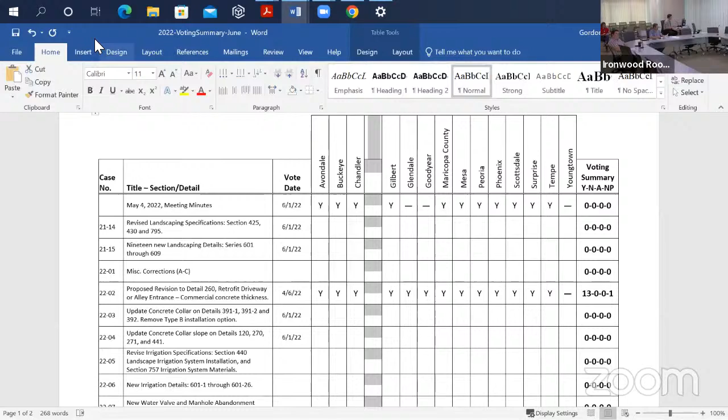Okay, we're going to go to item number 4. Revised landscape specification, section 425 topsoil, section 430 landscaping, and section 795 landscape material. Update sections based on landscape irrigation group recommended changes, sponsored by Ryan Nichols, Mesa, and an outside working group. I guess Ryan's not here, but I'd certainly like the proxy to say something about this case. And it is up for possible action.

Yeah, I guess that's my cue.

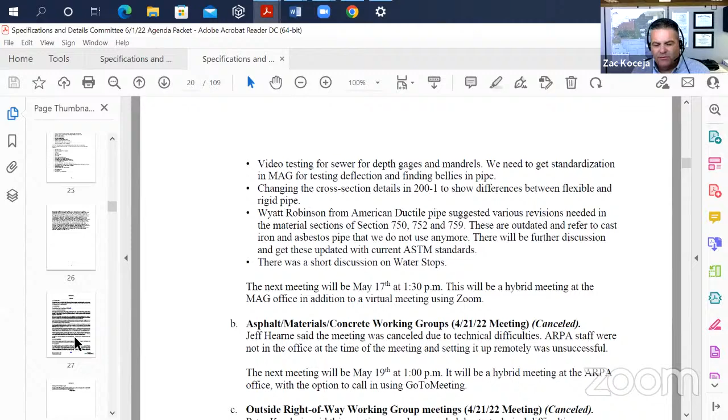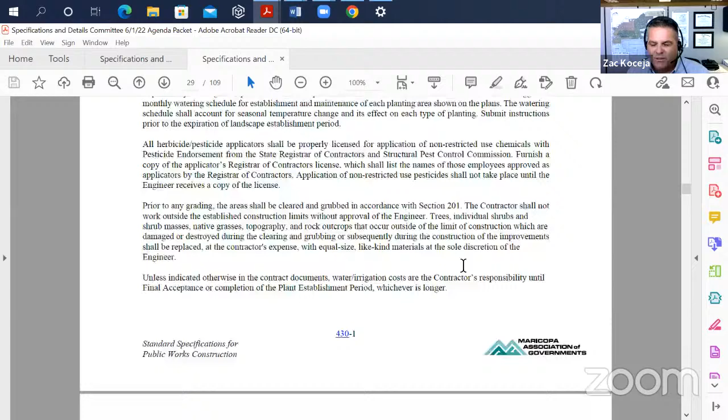So I'll talk specifically about these cases. This has been an effort that a few of us have been working on with MAG for quite a while on the landscape specific specifications. We've gone through multiple revisions of updating the specification sections for three sections: 425 topsoil, 430 landscaping, and 795 landscape materials. We've submitted these in the past for review and comment.

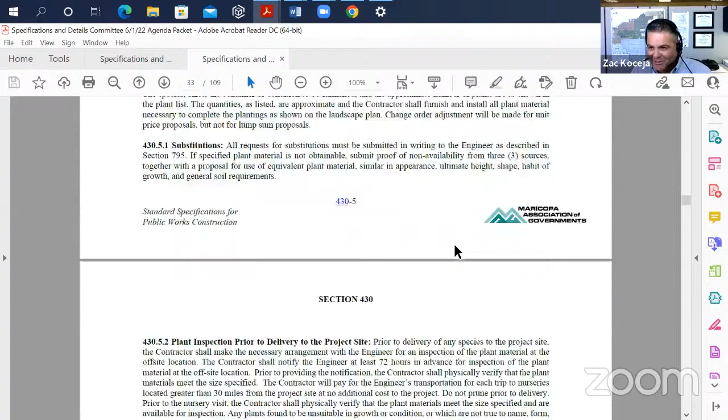We just went through an additional, what we're thinking is a final round of review and comment, and those comments were incorporated. I provided the final versions of these to Gordon last week to be presented for possible action of adopting these sections of the landscape specifications. I know we have Wayne Colbank with Logan Simpson Design and Ann with ASU on the call as well. I'm available for any questions, or Gordon, if there's something I left off, please feel free to chime in and correct anything I mentioned.

This is Peter Kandaris also. We discussed this in our last working group meeting. I think in terms of the specifications, we really didn't have a lot of changes, Zac. The ones you submitted last time, I think it was the details - we had the naming changes more than anything else. But in the spec, did we have any real substantial changes in the wording?

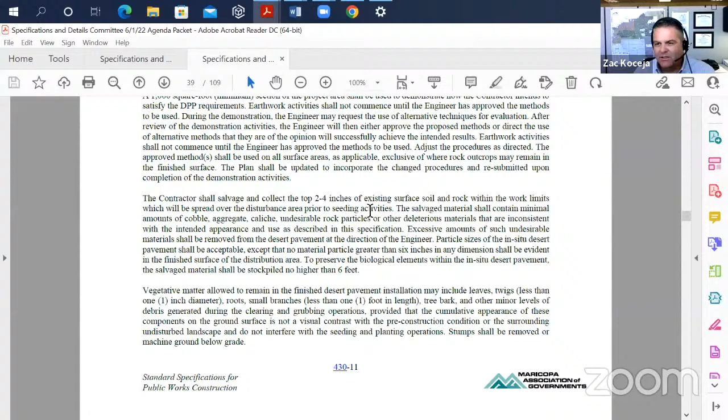Not so much in the content of the wording. Most of it was grammatical changes, but not really in the content. I went and incorporated the final comments, and nothing really changed from a content standpoint. It was mostly just cleaning up some of the text and grammatical changes.

Yeah, that's what I thought. We've incorporated any comments. I think we've now gone a number of cycles waiting to get more comments. Everything we have has been incorporated. So we're at that point - there's not a lot more we can do with the standards component.

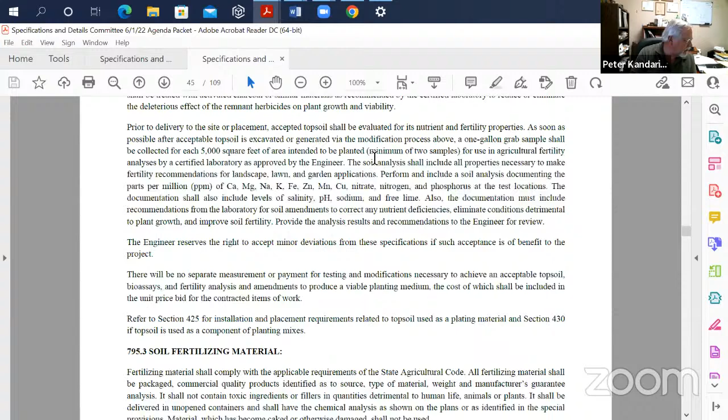Are we talking about both cases simultaneously, the 2114 and the 2115? I can't remember - we're going to do both at once. Separately. I'm sorry, we'll do it separately. Okay, good. Yeah, that one we did do some changes, not to content, but I think we're kind of at that point on the standards changes. We don't have anything else really to do left on it.

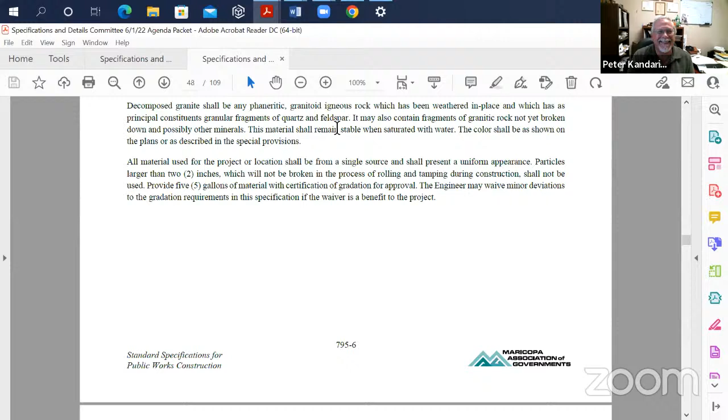And I can call for a vote, so. Are there any comments from the committee, questions or anything? Or does someone want to provide a motion to approve?

Carl, I'll go ahead and make a motion to approve case number 2114. This is Warren, I'll second that.

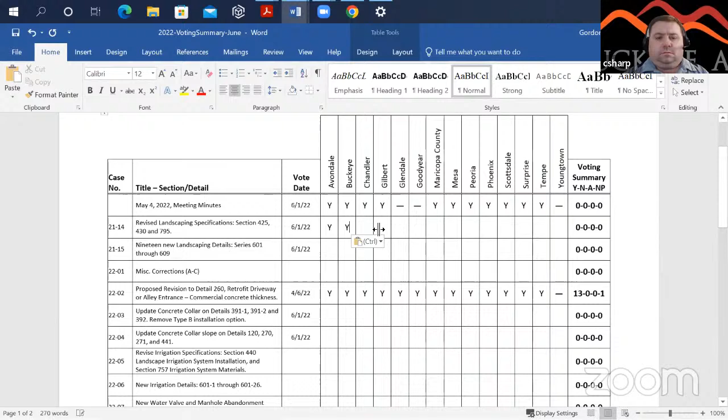Now we're going to do case 2115, new landscaping details - 19 new details based on city supplement and landscape irrigation group recommendations, 601 through 609 series. These are new details, all brand new, and they're distinct from, related to the irrigation companies.

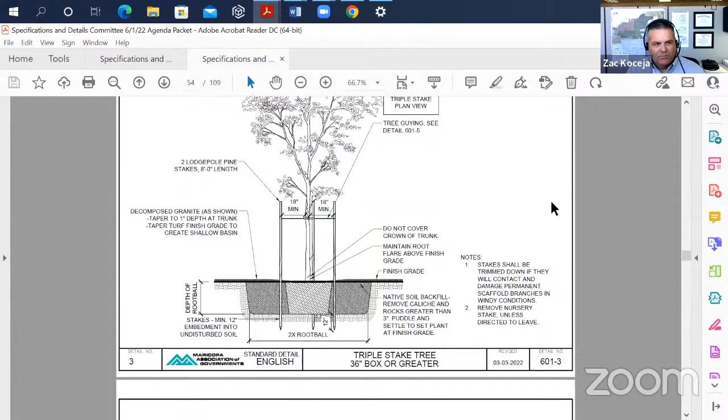This is Zac again, I can go ahead and talk about the details as well. This effort to bring to light these new details was a concurrent effort with the landscape specifications. We spent a little bit more time working with MAG on reviewing the specifications. These details have gone under review, and I believe there's a little bit of content change, but the biggest comment was numbering the details in an order consistent with MAG as far as sectioning. There was an additional detail recently added, for palm tree staking installation and staking. So that was the last thing that changed - the numbering and the addition of that palm tree staking.

Yeah, if I remember right on our grouping, you'll see there's now 601-1, 2, 3, and so on, the 603-1s. The groupings were based on the type of installation, and I'm trying to remember what we did - I'm looking for my notes here. So I think the 601 grouping, Zac, those were for trees.

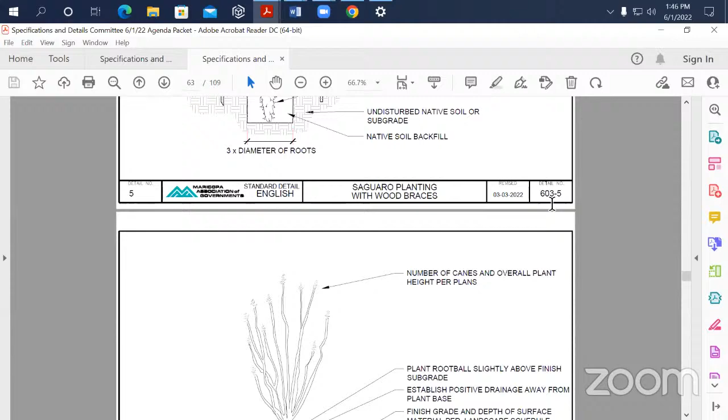Peter, this is Wayne. There we go. Yeah, the 601 was for the staking of the plantings. The 603 was actually the planting details themselves for all plant types - as you'll see here, there's agaves and prickly pears, trees, and even the palm tree that was added. The next series was what we call hardscape, or the decomposed granite and the rock materials.

And so the details were broken out and reorganized by groupings of activities, as was suggested. I think this makes it nice now, because if we had any details related to those groupings, we don't have to keep on this. They won't be mixed up with everything else.

So if you have another planting detail, it goes with planting work. If you have hardscape, it goes with hardscape. And I think that was what we wanted to get in.

I think the palm tree was the city of Chandler. We got that added to it. There were some minor changes, I think, made from the city of Chandler that we talked about in the working group.

Yes, this detail was suggested by Warren, which was a great suggestion that was actually overlooked. The basis of this was a city of Chandler detail. Through that, several of our landscape architects have made some adjustments. We passed it back through Warren, and Warren has given us a thumbs up on it. Okay, so he's had a chance to see it then. Good. Yes, it looks great.

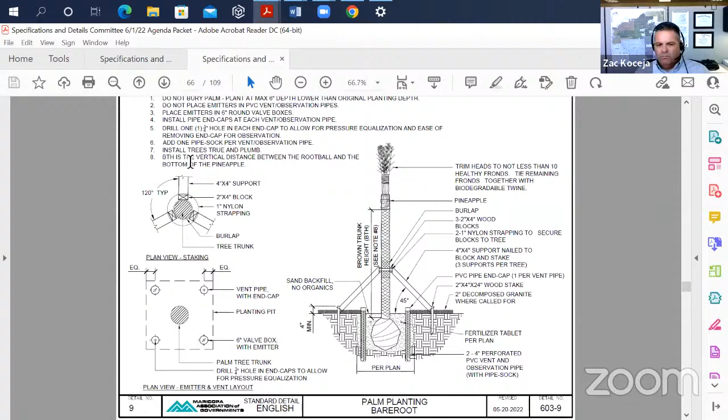Section 430, I'm trying to pull that up. Do we specify within it the type of fertilizer tablet? It's actually going to be in 795. Oh, okay.

All right, I thought it was okay. I'm curious, I don't have that. I thought I had them both sitting here, but I don't. Fertilizer tablets are a pretty common material. Yeah, I'm just trying to see how we word it. Something that's not going to be missed by anybody, I don't think.

I'm just trying to see how we worded it in 795. Remember which subsection? Take a look at section 430.5.6, I thought that was it. I know it calls for... if you look at section, yeah, you're right, 430.5.6, it calls for the quantity, but as far as the type or the manufacturer, that may be covered in 795.

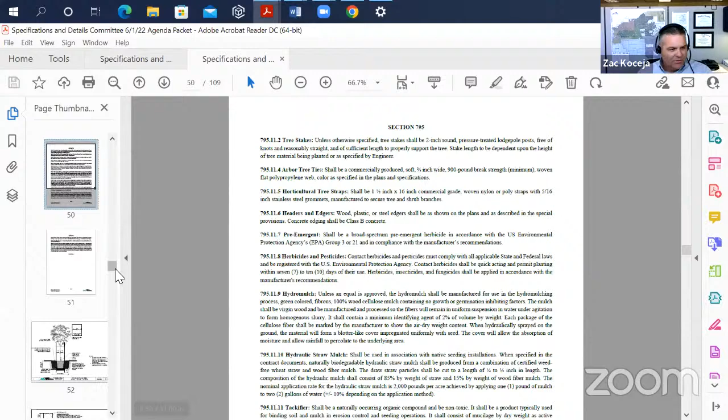I'll look there as well. What did you say for the subsection? Right, 430.5.6. That's got the quantities, yeah.

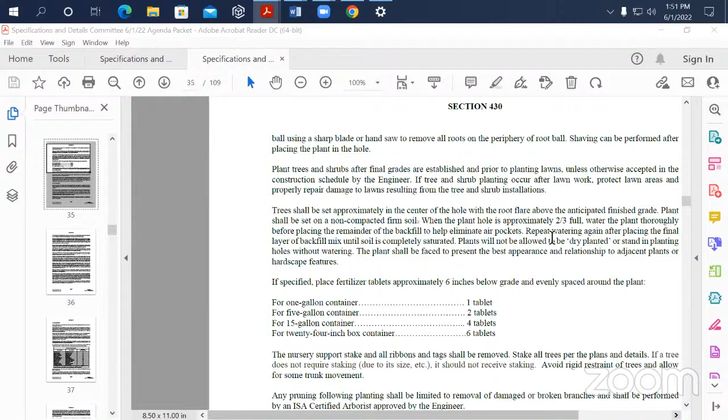Oh, if that's the case, we really should be referencing section 430 then, even if it's in the most general sense. Reference it and maybe then say 'or as specified on plans,' something of that nature. Yeah, that's not a bad idea.

This would be then more of a default, unless otherwise specified on the plan, something like that. Oh yeah, this is if specified. Yeah, this is an 'if specified' case.

Again, I'll trust your judgment on standard industry, so whatever makes the most sense. Yeah, that's a good point. We're going to get a contradiction here or not.

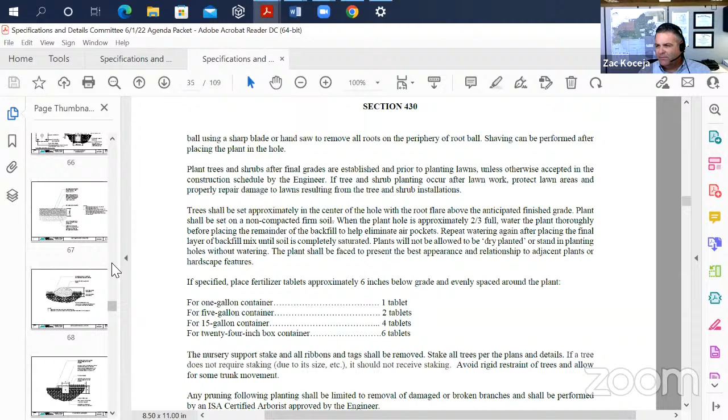I believe the palm tree detail is the only one that calls it out specifically. So maybe what we do is just remove it from that one detail, and we always have the specifications to go back onto if the designer chooses to specify tablets or not. Yeah, that may be a better option. If the specification doesn't say it's required, there could be easy confusion on the detail.

That makes sense to me. Yeah, I think I'd agree. Get rid of it there. And then related to that, after you make that note, in section 795.3.4 is where it talks about the chemical composition of the fertilizer tabs, just for reference from the material standpoint. Yeah.

If we remove it from here, it becomes a non-issue. Yeah, I agree. Any other thoughts on that?

I'm definitely not a landscape person. That's what I do on the weekend at home.

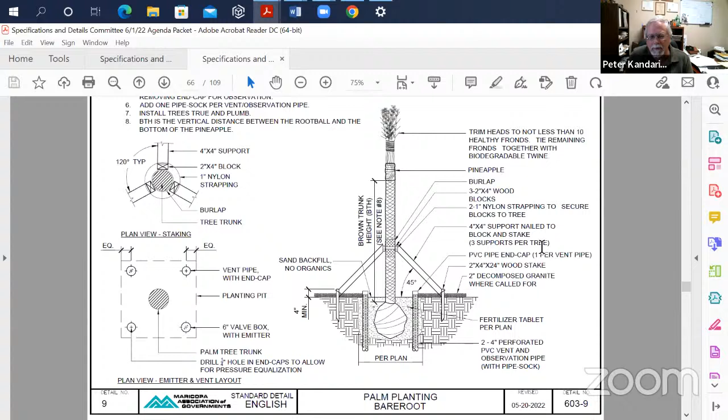So do I understand that the suggestion is just to remove the reference to the fertilizer tablet on this detail? Yeah. If we don't, then we really should be specifying where more information is on it in the standards. But if the standard says 'if specified,' we're kind of going around in a circle. If it's noted here, it's going to be assumed it's always used, but in the standard, in the spec, it's not saying it's always used.

It's easy enough to remove this note from the detail.

Besides the fertilizer tablet, are there any other comments or questions? Just a little minor comment on the bottom left. For detail number 9, I just need to have 603-9 on both sides to be consistent, right? Yeah, that's true of all of the details. I noticed that as well, but that's a very minor thing I could correct after the fact if you did want to go ahead and vote on them today.

Okay, so we have: remove the fertilizer tablet callout, and correct the title blocks — I guess remove one of the 9s or make them the same on both sides. Any other comments?

Yeah, Carl, this is Jim Badowich with Avondale. Should there be any dimension as far as how deep these things get buried? I'm trying to find it here. Maybe it's here, I'm not sure. As far as the depth, and I know when working with contractors there's a specific depth they need to be planted to — this is for the palm tree. Is it covered in a note?

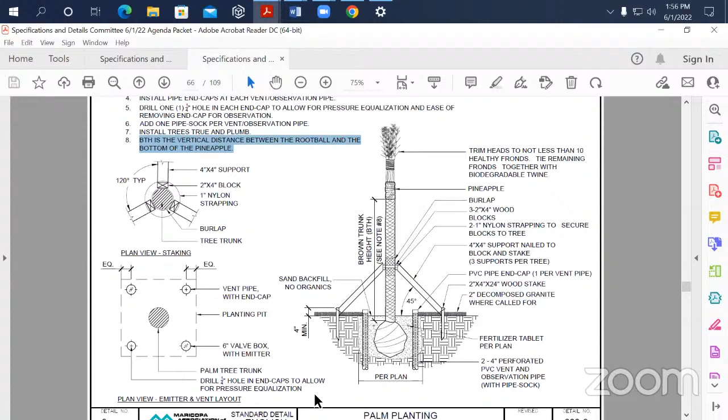I've been told it's critical how much dirt is put over the root ball as far as placement. I don't know if that's on here. Wayne, you're on mute — I wondered if you could address that, because I thought we had talked about that. Yes, and I thought it was on the detail. Yeah. Can you scroll up, Gordon, on the notes? Yeah, it's the first note.

What does that mean, 'at max 6-inch depth, lower than original planting depth'? You'll see on the detail that the top of the root ball can't be deeper than 6 inches below the finished grade, because palm trees are basically relocated from site to site. It's that dimension of staying within that top 6 inches that's the critical piece, so you don't bury them — people have done that in the past. People have stuck the root ball up above grade, but that's not really the common practice. Mostly people tend to bury them deeper than need be, and so that's the dimension that's critical there.

But how do they know the original planting depth? These come from California — it needs to be something they can measure in the field and say, okay, here's the top of the root ball, you have the root ball there. So do we need a note to specify that the top of the root ball is the original planting depth?

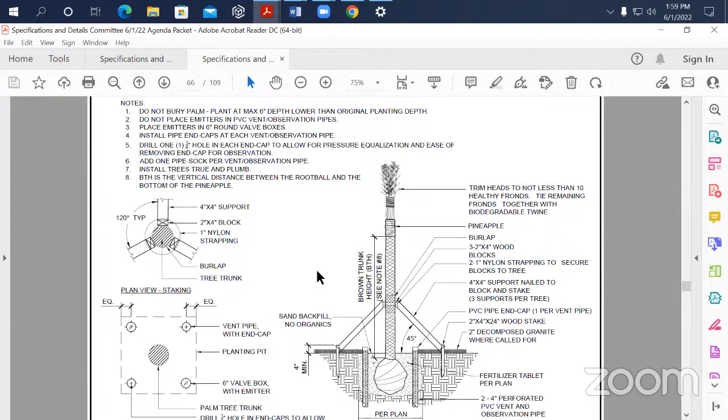Easy enough to do. Because it's a big operation — you've got traffic control, you've got a crane waiting, and we don't want to be thinking about how deep to do this and then have to find out what the original planting depth was. It just seems like too much guesswork. A good comment.

So we have 2 changes that we would make to this sheet: change the words 'original planting depth' to 'top of the root ball,' and then delete the fertilizer tablet per plan and the arrow associated with it.

Any other comments, questions? So the question comes down to, do we want to bring this back next month with those 2 changes, or would you all like to vote on it now?

I think the change probably should be done by someone familiar with that detail. Okay, I think that would be appropriate. Okay, we'll just bring it back. We'll get those changes and get that resubmitted.

Mention where that root ball is in relation to the finished grade. Okay. Mike, thank you.

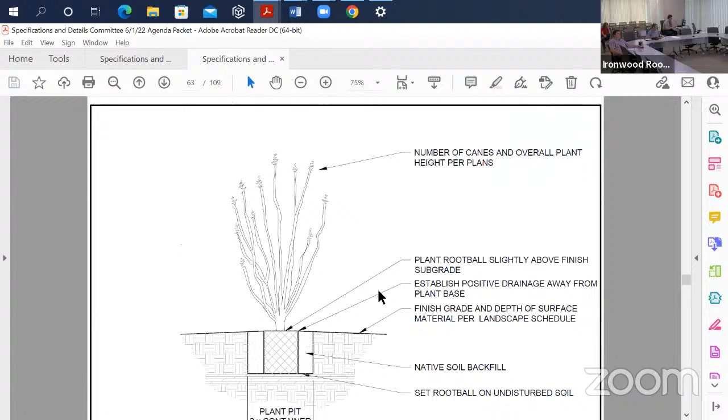Any other comments on this case? Okay, we'll hold this with these changes and bring it back next month.

Number 6, case 2201, miscellaneous corrections. We have 3 of them here that have been here for multiple meetings. Are there any other miscellaneous corrections anybody has?

Okay, not hearing any. We'll carry. Usually carry these till the end of the year and then vote on them.

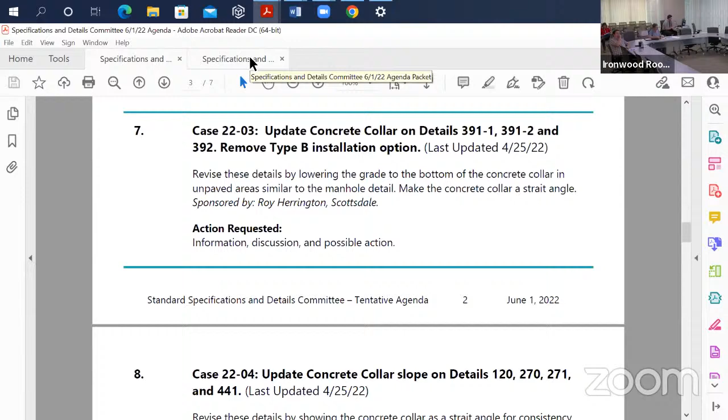Number 7, case 2203, update concrete collar on detail 391-1, 391-2, and 392. Remove type B installation option. It was last updated 4/25/22. Revise these details by lowering the grade to the bottom of the concrete collar in unpaved areas, similar to the manhole detail. Make the concrete collar a straight angle. Sponsored by Roy Herrington, and it's up for discussion and possible vote.

So, Carl, this is Roy. Thank you. Just an update to the committee: I haven't received any additional comments other than what was discussed at the last monthly meeting. We did have a meeting with the water and sewer working group, and there weren't any additional comments to this detail. This is making modifications to the concrete collar for detail 391-1, 391-2, and 392, basically taking the outside edge of the collar, which the current detail shows is 2 inches below grade, and bringing it so that the outside edge of the collar is at grade.

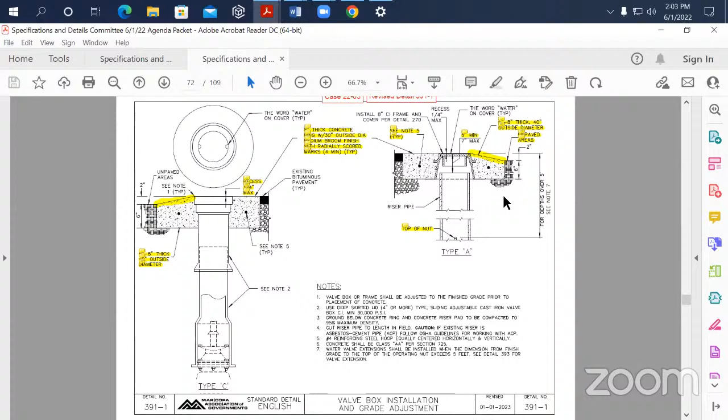So it kind of keeps the dirt or anything from washing into the valve box. Essentially, this was something that was brought up by our maintenance groups here at the city. But I have not received any additional comments.

And the detail, the 392, the debris cap — because we were getting rid of the type B, that detail was basically removed, and the collar was basically redrawn as what's proposed on 391-1 and 391-2.

I believe the old detail used to have like a curve, kind of a reverse curve type of thing. Exactly, almost like an S curve, like the roll curb profile that you would see in the street. Yeah, and this would be probably much easier to pour and form and finish.

Are there any questions or comments on these detail changes? Carl, I'll make a motion to vote on and approve case 2203.

Carl, I'll second that. Okay, we have a motion and a second to approve this case, 2203. We'll take a vote.

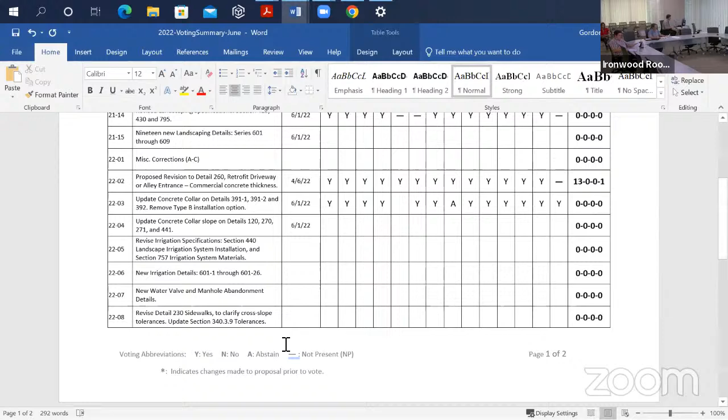Okay, number 8, case 2204. Update concrete collar slope on detail 120, 270, 271, and 441. Last updated 4/25/22. Revise these details by showing the concrete collars as straight slope for consistency.

Sponsored by Roy Herrington. Basically, I think it's pretty much the same as the last case. Anything on that, Roy, you want to tell the committee? Thank you, Carl. You're exactly right.

This case kind of stemmed from that previous case. Essentially this is making the collars for the survey marker, for detail 270, the frame and cover and grade adjustment, 271 and 441, consistent with the collar from the previous case 22-03.

And this case as well, I hadn't received any additional comments on. Does anybody want to comment on this case or have any questions?

Does anyone want to make a motion to approve this case? Carl, I'll go ahead and motion to approve case 2204. Okay, thank you, Craig. This is Warren, I'll second. Okay, we'll take a vote.

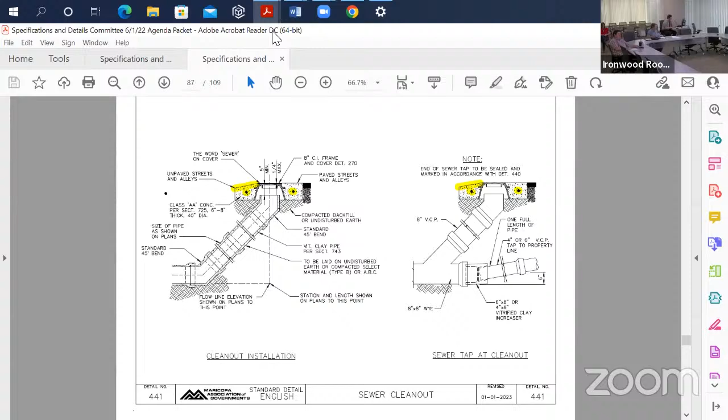Starting with Avondale, Yes. Buckeye, yes. Chandler, Yes. El Mirage, Yes. Gilbert, Yes. Glendale, Goodyear, Yes. Maricopa County, Yes. Mesa, Abstain. Peoria, Yes. Phoenix, Yes. Scottsdale, Yes. Surprise, Yes. Tempe, Yes. Youngtown, Yes. Thank you.

Okay, that case passes.

Number 9, case 2205, revised irrigation specification. Revised section 440 landscape irrigation system installation and section 757 irrigation system materials, sponsored by Ryan Nichols.

Zac, would you like to, I'm not sure if Ryan passed this on to you or not, but would you like to talk about it? Yeah, for sure. I'm wondering, Wayne, we didn't coordinate beforehand. Sorry, Wayne, did you want to mention anything regarding the specifications or details on the irrigation? Would you like me to take the lead? All right, so not hearing a response from Wayne, I'll go ahead and explain.

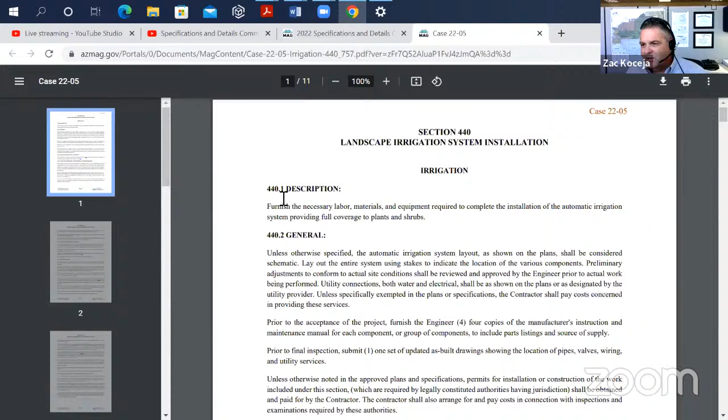Very similar to the landscape specifications, the irrigation section works hand in hand with the landscape and irrigation design. We have some design specifications as well as materials provided in these specifications. I believe we are a little behind as far as the timing of the irrigation, going with the landscape specifications, but we've gone through multiple edits. We feel these are like a finalized version. I know these have been presented, I believe we discussed them last month, and so they're currently out for review and comment. I don't know that I've received too many comments.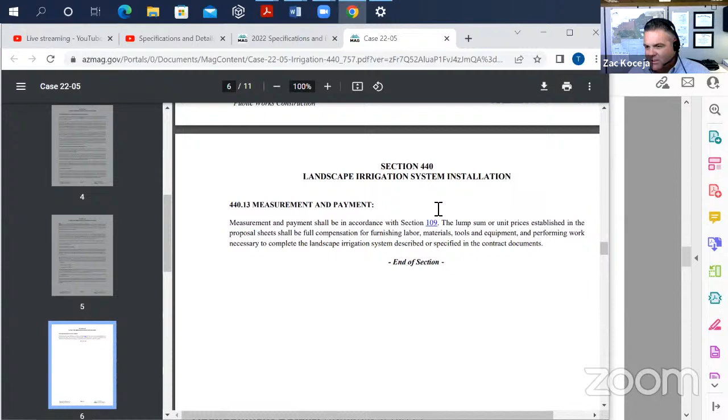I need to follow up with Ryan to see if there's been any other comments come in. But again, this really the same, it's a very similar effort to the landscape specifications where we haven't had up-to-date specifications and or details for the landscape irrigation. And so this will update both sections and provide a complementary set of specifications and details for the landscape details that were just passed, adopted, approved.

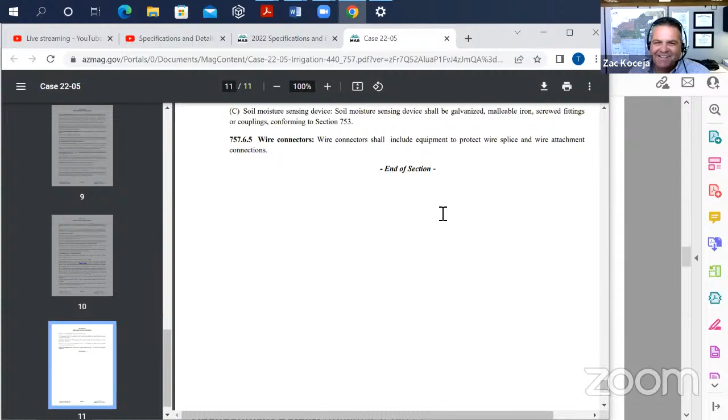One of the things we've been requested last time, when I was in the process of doing, is kind of creating a roadmap of the sections, because I think the question was everything brought over completely. Unfortunately, I was not able to get that completed by this meeting. I am working to get that, to provide a comfort level that things weren't missed, or I'd be able to have the committee and their staff see what was changed and what it looks like.

Simultaneously on the details, I know it's almost easier to talk both of them at the same time on this, that we and Wayne and company were in the process of organizing those also. We had not, at the time of our last working group meeting, come up with specifically how they were going to be organized. So I think we're still, unless something, Gordon, did Wayne submit anything on those on a reorganization? I wasn't sure. I don't think there's been any changes to these details yet. Yeah, I didn't think so.

So we have to do a similar thing on these. We're putting them in groups. Right now, I think they're just straight numbered off. So we're going to be doing that probably at our next working group meeting. We'll bring that up on the 16th and get these ones organized in a similar manner, so any additions or modifications stay within the same number group. We don't get them jumbled all over the place. I think we're going to start on what we thought.

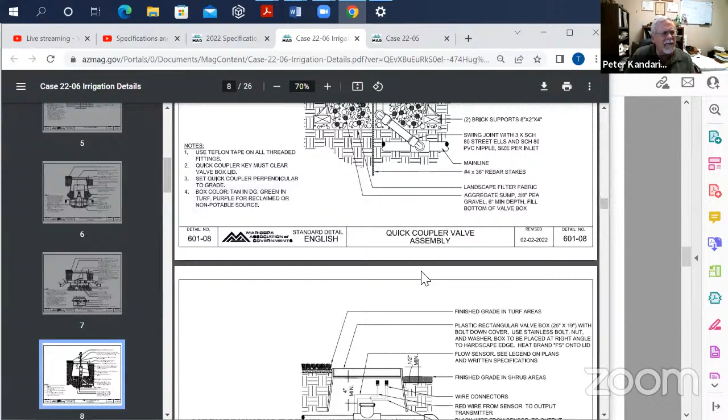I think we said like 610 or something, starting that series with the irrigation. Try to leave the planting and the plants and hardscape stuff in the 600, and then we'll start 610 on these ones. So that's something we still need to do on getting them organized while we were waiting to get comments in.

Are there any other comments, questions? This is Warren. Just one minor comment on this, on the sections, the subheadings on those sections. Those I don't believe you need. It's sort of inconsistent with the rest of the MAG sections. Just that at the beginning of each section, there's a subheading.

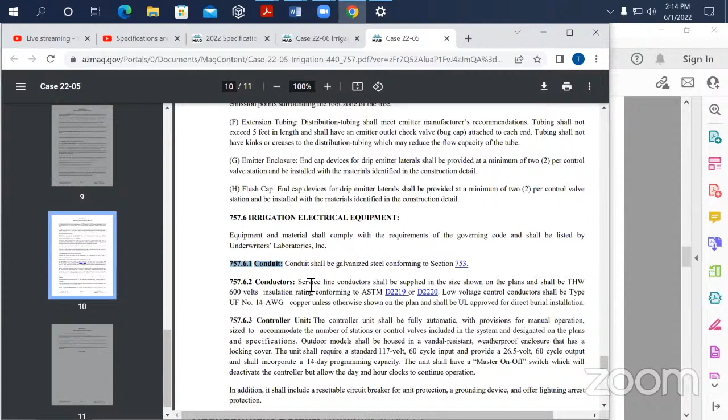You mean these? But the very first page of the specs. Correct. If you go up to the very beginning there, right there, irrigation. So that's, I don't believe that's something we've used in other sections. Yes, you're correct on that. We need to delete that to make them consistent. You're correct.

I have a question on landscaping, irrigation in the right of way. Is it subject to trace wire at certain depths? I don't know if it's subject to the other laws that govern underground utilities, but I do know that on some projects we have problems locating irrigation lines when we're doing reconstruction.

I am not an expert in that. I don't know, Zac, do you know more about that? I apologize, I haven't read through them to look for that. That is an issue on many projects I've worked on where there's irrigation. I know nobody really knows where the lines are.

When it comes to utility locating, for example, ADOT will, if you call them for a blue stake ticket, they'll go out and actually hook up to the ground on the wires, the control wires of the irrigation system, and that's how they'll trace out the irrigation lines. If you've got irrigation PVC lines in the ground by themselves, then of course, unless you have a tracer wire, you're never going to locate that line unless you hit it.

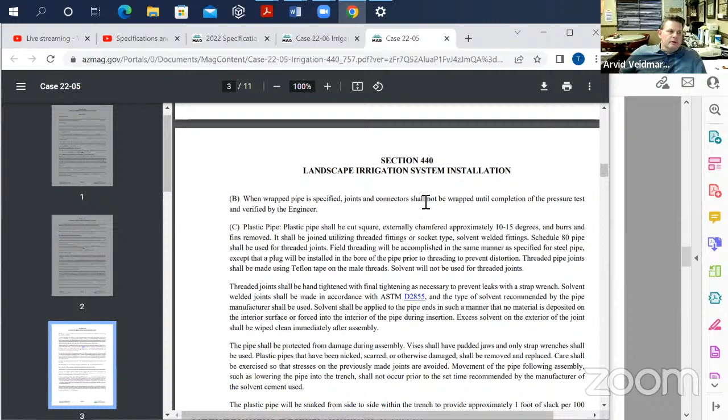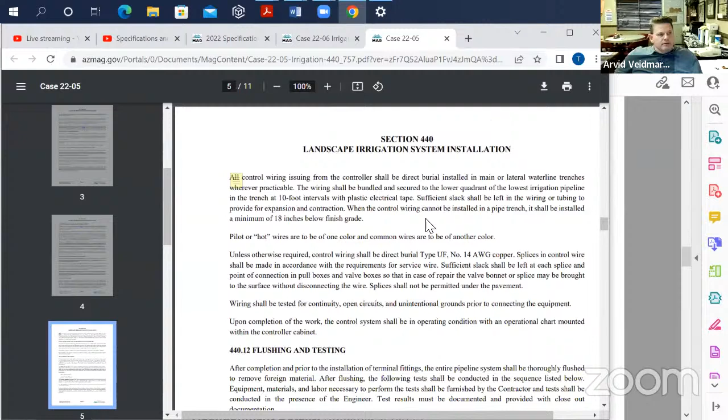I do not think that tracer wires are required on the pipes themselves, though. Typically, no. If you take pretty much any county, state, or city project that's landscape based, they're not going to put a tracer wire in with the irrigation lines, and that's typically because the irrigation main is where the control wires are. So they use the control wires as the tracer wire. Off of the main going to the various zones, it steps down in size, but it's the main that's typically under pressure, which is obviously one side of the valve.

The other side of the valve, where there's not always water, will get hit, and then it'll get repaired and just put back in service typically before it goes active.

Yeah, I've thought about that too, Carl. It's true, most of the wiring is put in the same trench as the main line, but it is important to locate these pressurized main lines. Once you get to the control valves, it doesn't matter because you can shut that off, and you're not going to put tracer wire on laterals and all that, but the main lines need to be marked.

So my only comment on that would be, if they don't use a joint trench for the wiring for main lines, then the main line needs a separate tracer wire installed. And again, this is just in the right of ways.

And to that point too, you need to make sure on some level that the shutoff valve is readily known, because that's one of the biggest hurdles on specifically ADOT projects. The shutoff valves for the main are typically a mile apart in those fenced-in houses, and you can't get inside of them without cutting the locks off. So you'll have water run for hours and hours before you get someone on site to actually shut it down.

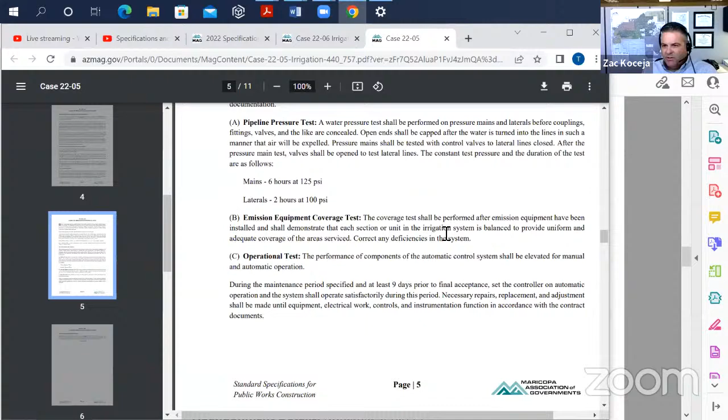Is that in here, 18 inches? Is it specified here? Yeah, I'm pretty sure, this is a good comment. I'd like to go back and just verify two things: that we have a main line at 18 inches - yep, right there, control wire - and that our lateral lines are 12-inch minimum.

But it's a good point, because a lot of times you may have a main line extension for some reason that doesn't have a valve on the end, so there wouldn't be a control wire that runs with it. So if you're trying to trace out that main line, for some random reason, you may not have a control wire next to it. I think we can put in some wording that in the event that situation occurs, there will be an identified tracing wire that goes along with that main line.

Yeah, also, we just did that on one of our projects. The wiring is for, we shifted the meters, so our main line isn't going to have any wire with it. So we're wanting it marked with tracer wire. So it does happen.

Question for you on the main line itself too. Do you spec out an inline valve every so far to allow for shutting off and isolating a break, or is it just at the meter station for the control house?

My background is mainly from municipal type projects and not really long linear projects in the right of way, but typically we have isolation valves a lot more frequent than mile intervals. Even on some of our roadway projects in the right of way, we would do isolation valves more frequently for that reason. So you're not going far out to find an isolation valve in the event of a break.

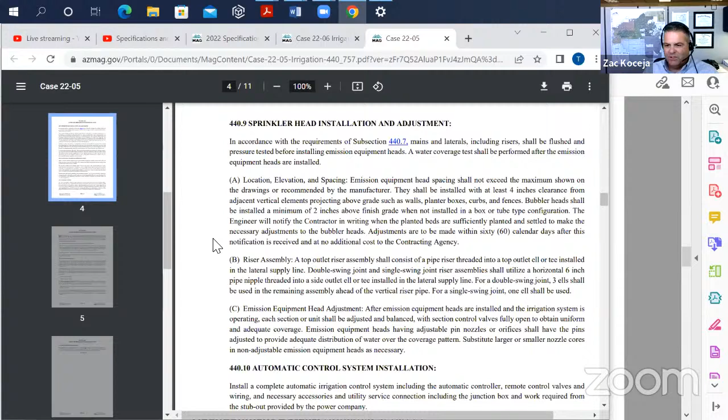But again, this was perfect. This is exactly what I was hoping to hear, some feedback on making sure some of these detail items are included in the specs. So I'll definitely double check the things that have been mentioned so far.

Yeah, and I'll double up on that, Zach, that we do like to get all the comments, and these ones we'll talk about at the next meeting. I know you're going to work on it prior to that, the meeting on the 16th, and we'll have it ready for July. But as we start getting toward the end of the year, it would be very nice to get these voted on this year if we're getting these comments resolved rather quickly.

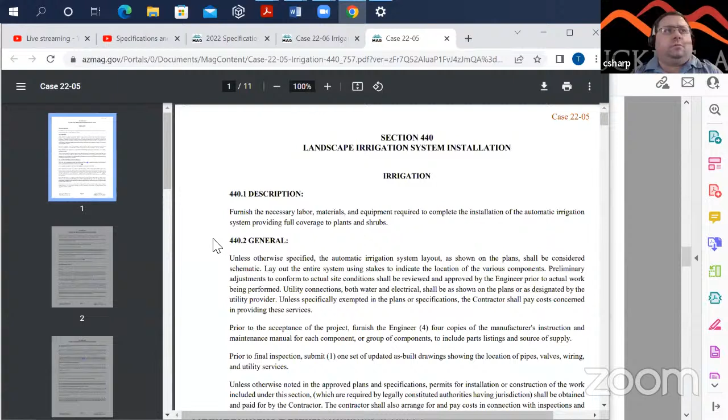Peter, Zach, this is Craig out in Buckeye. Quick question on this, just the specific comment on the wired joint trench. Is there a way we could put this in the details in the 2206 section? And the reason I ask is most of these things, when our contractors are putting these in, they're looking at the pictures, which are the details, and not so much the specs themselves.

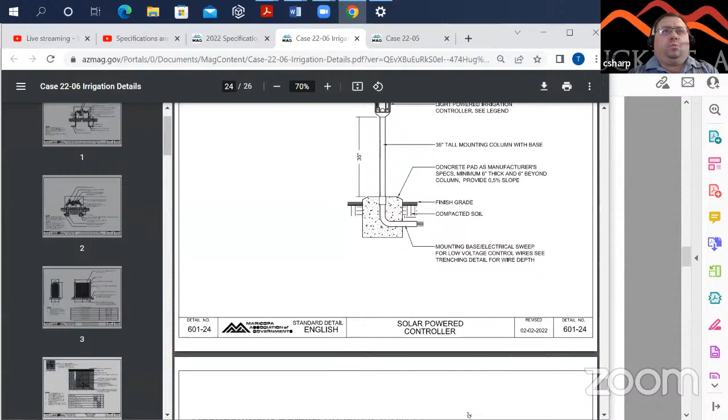Yeah, no, that's a really good point. I believe we have a detail section specific to that. It should be like a pipe placement depth, and it calls out the wiring. Maybe scroll through these, I don't remember offhand. Yeah, detail 60104 and 60105, trench sleeving, pipe and wire trenching. So yeah, I was kind of looking at that, and we were talking 12 to 14 inches deep.

I guess I need to look at these details a little closer. This section calls out the mainline depth—2 to 4 inch at 18 inches deep, going deeper depending on pipe size. It also calls out that control wire location should remain on the same side of the mainline throughout the project, so adjacent to the mainline, not underneath it.

If there's anything we need to do to add additional clarification from the detail standpoint, I totally agree, because not everybody's looking at the specifications. The pictures are a lot easier to follow in the field, so we definitely want to make sure it's clear and understandable.

Right, exactly. Okay, Zach, one question—I need to study these a little more too, but I know we have instances of potable irrigation or reclaimed irrigation. Is there anything where we need to mention that? Obviously with reclaim you have to identify it differently, and I believe that's covered in the specifications.

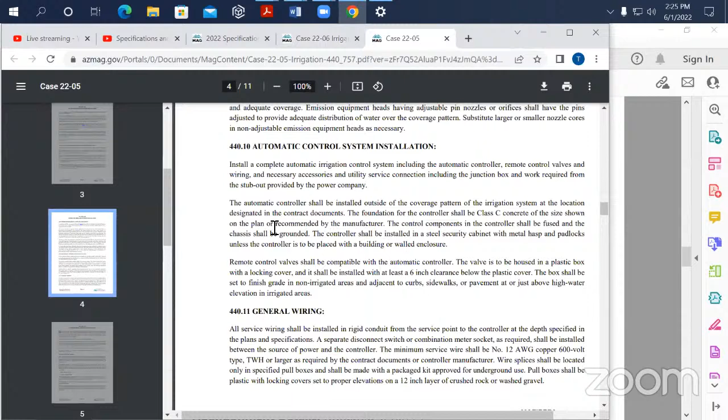I think you're good there. Well, look right here, the one on the screen—if you go back to note 4, it talks about purple for reclaimed or non-potable source. I believe that's infused throughout both the specifications and the details. Anytime it's a non-potable water source, it's required to have purple valves, purple lids, purple boxes.

That's a great comment, something we can go back and make sure is consistent throughout, giving you the option—if you're doing a potable water source you don't have to follow the purple. There are cases here at the City of Mesa, anticipating future water source changes, where we're using some of the purple equipment even though it's a potable source. Not typical, but I like that there are two options within the specifications and details. That's a good point; we can make sure it's clear in the specifications too.

These are brand new specs and details, correct? The details, yes, the specs, no. Okay, and I have to be honest, I only saw them for the first time after the last meeting, which I wasn't at. So I need to review these, and I'll try to get them back to you well before the next meeting.

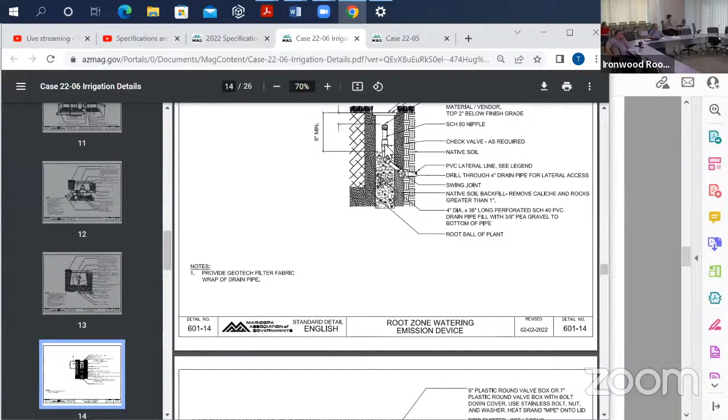Oh, that was another question I had—you've got a lot of equipment callouts. I assume it's pretty generic, not name brand, or maybe something called out or equivalent. I don't remember us having any product names, specific vendor-related product names called out, but I'll take another look. Not that I remember—not in the 700 section, I know that.

I know there was effort to not be manufacturer specific for various reasons. Yeah, so all these details should just call out, like, the pop-up head—basically just pop-up head, rotor type, see legend. So on the plan sheet, for City of Mesa, if it's not a federally funded project, we use our preferred products that our landscape maintenance crew has on the truck. In our landscape legend is where we'd call out if it's a Rain Bird or a Hunter or anything like that. But from the MAG standpoint, the specifications and details, we knew we couldn't be manufacturer specific on the equipment.

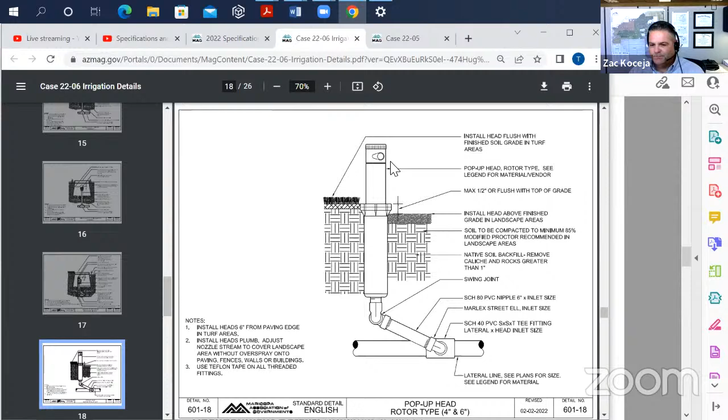Any other comments from anybody? I'd encourage all of us to really take a look at these—this is a pretty big deal, these brand new details and updated specifications. So I think when they're put to use there's going to be quite a bit of feedback coming back from the field, so it's important for us to really take a good look at these details and try to get any comments in.

Would that be to Zach, or would it be to Ryan? It should go to Ryan, I think. Ryan? Yeah, okay. Ryan's been collecting the comments and then he forwards them on to me and Wayne, and we implement the comments, but the back and forth is through Ryan.

Okay. Have we anything else, or have we pretty much talked through both cases, 2205 and 2206.

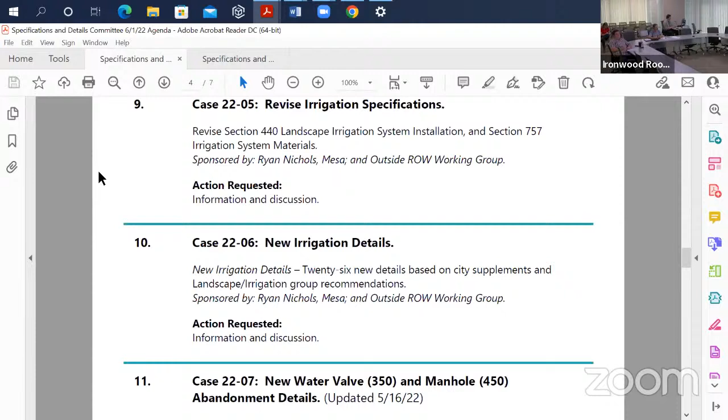Carl, just as a general comment to Peter, Zach, and Wayne - I've made this comment before - with these new details, it's really going to up our game for the rest of the details because these are very, very nice. Yeah, they did a heck of a job on them.

So kudos to everybody. Anything else?

Okay, we're going to go to number 11, case 2207, new water valve 350 and manhole 450 abandonment details, updated 5/16/22.

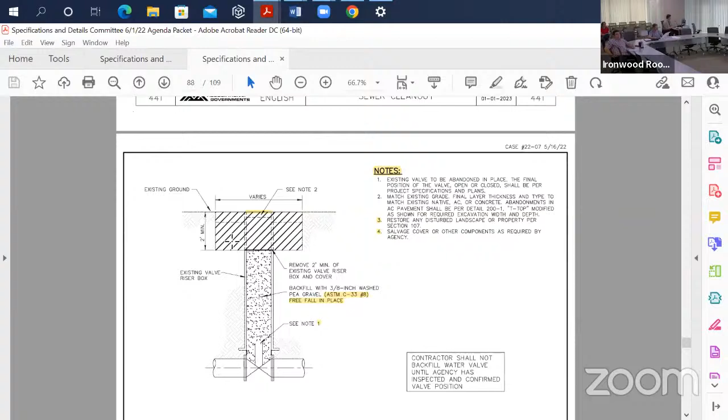Create a new detail 350, existing water valve abandonment, and detail 450, existing manhole abandonment, sponsored by Warren. You want to let the committee know what's going on here, Warren?

Sure, thank you. Good afternoon, everyone. The highlighted changes reflect the comments from our last committee meeting. We did review these in the working group, and I don't believe we made any other changes, so this reflects our comments from last time.

And then some additional ones I received from Craig - I'll talk through those, his group had some good comments. Starting with the backfill for the pea gravel, see now the ASTM references there, and also the free fall in place compaction. Does that look okay to everyone now?

And then just some other clarifications. There's a graphical fix I made at the top to show the actual valve cover a little more clearly. Notes 3 and 4 were added based on some comments from Craig and his group - good comments. Any disturbed landscaping or property has to be restored; Section 107 covers that, so I just used that. And then if the agency wants to salvage any of the components, there's that allowance there.

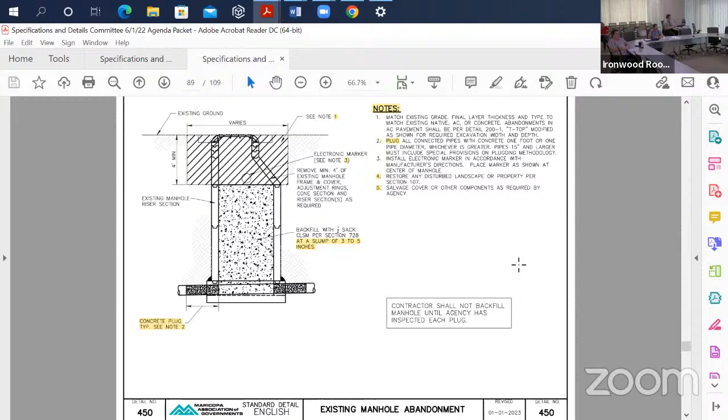Hearing none, we'll maybe look at bringing this forward for a vote next meeting. If you think it's ready, I'll action it. I'm ready for action. Any other comments? Okay.

Case number 12, case 2208, revised detail 230 sidewalk to clarify cross slope tolerance and update section 340.3.9 tolerances.

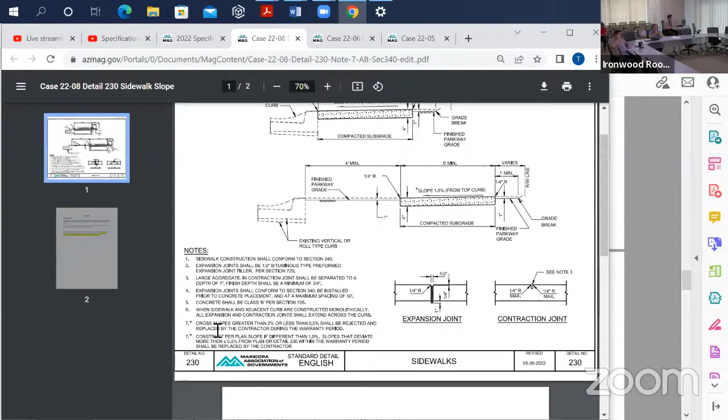I was not at the last meeting. My proxy was here, and I've read through the meeting notes, and I think towards the end it was suggested that maybe note number 7 - and I got 2 of them on this. One is the cross slope cannot be more than 2% or less than 0.5%.

If it's outside of those tolerances, then it would be rejected and replaced. But the suggestion, I think it came from Warren, was: construct per plan slope if different than 1.5%. Slopes that deviate more than plus or minus 0.5% from plan or detail 230 within the warranty period shall be replaced by the contractor.

So I wasn't at the meeting, I'm not sure which way. I think the first note 7 is what I had originally, and you had some problems with that. If there's that much of a tolerance, then there might be a tendency to not build it to the 1.5% or per the plan.

And then I went and looked at the specifications, and I know you have the straight edge type of thing, but I was looking more - this is where it all started, was it on the tolerances? They want all finished concrete width and alignment shall not deviate from the plans, typical section - I can't quite read it.

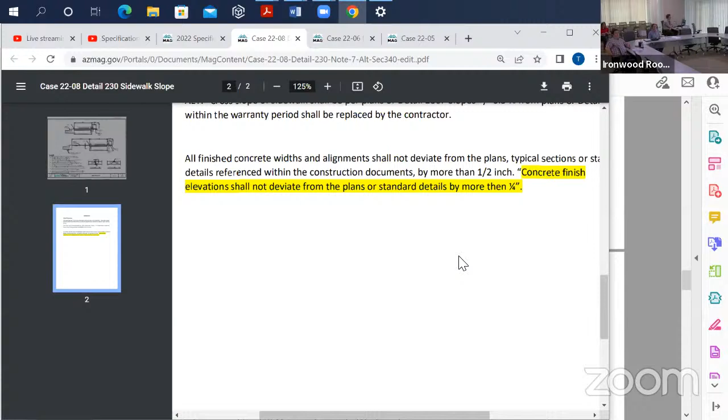It says in there now that it can vary by 1/2 inch. And if I do 1/2 inch vertical, you're going to get more than 2% on a certain width of sidewalk. If you allow the hold one to plan elevation, and you allow the outer edge to rise 1/2 inch, it will exceed 2%. So I added a sentence that concrete finish elevations shall not deviate from the plan or standard details by more than 1/4 inch. So there's an allowance of 1/2 inch horizontally, but I'm thinking the elevation is more critical, and a variation of 1/4 inch vertical will keep it within those tolerances.

Again, I'm open to any and all suggestions or questions on this one. We're trying to allow some variation, because it does happen over time where you poured it, set it, and finished it exactly to plan, but within the warranty period the ground swelled or shrunk, or there's landscaping nearby that caused some settlement, or other factors. I've dealt with this quite a bit, especially in areas with expansive soils.

Craig, I think you had some comments at the last meeting. Yeah, I'm reading through it right now, and I think the intent is we're looking for a standard cross section of 1.5%, not to exceed 2%, but 1.5% is the target. Reading through this, it looks like it's talking about concrete widths and alignments, which suggests we're looking at a cross slope tolerance and a longitudinal tolerance. I do agree, if we stick with 1/2 inch on our cross slope, we're gonna blow our slopes pretty bad.

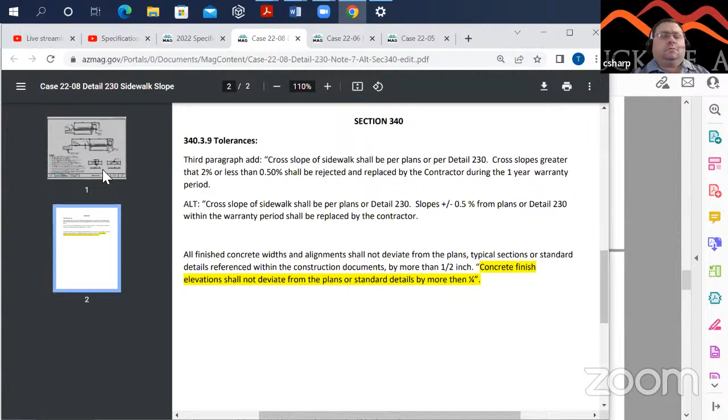So does it sound like the second note there is more in tune with the design intent of trying to build it to the 1.5%? Yeah, I like the second note. What I was always concerned about is, if we can go down to 0.5% and then up to 2%, you're going to have this undulating sidewalk, and I don't think any of us want that. But you have the possibility of that anyway. Yeah, but if we just throw the 1/4 inch on there and say this is where we're at, not to exceed — and if I recall, I think it was talking about, well, this is a cross slope.

When you start throwing in longitudinal slope, you've got to do your calculus and vector geometry, and you might get something different. But the way I interpret ADA is it's like taking a cross section, and it's that cross slope they're most concerned about. Longitudinal slope, at least in my research of ADA, especially on sidewalks, not necessarily curb ramps, but on sidewalks, they're not asking you to flatten the world for ADA standards. I believe the ProWAG guidelines actually talk about your sidewalk or pathways following the slope of the road you're adjacent to. So obviously, if you're on a 4% road, you're not going to get a 2% sidewalk.

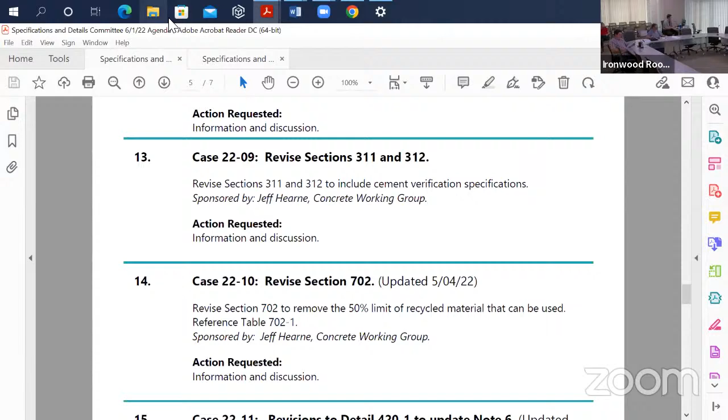Case 2209, revised section 311 and 312 to include cement verification specifications, sponsored by Jeff Hearne, Concrete Working Group. Thanks, Carl. I've received no comments, no discussions on the wording of either one of these sections up to this point.

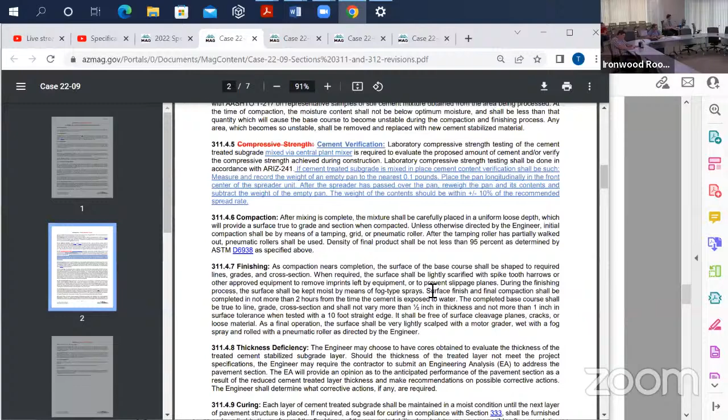Was this discussed at the working group? It has been several times, yes. Okay, I don't think I made it to your last working group. So again, I would ask you guys to make sure your team members have had a look at this. If we don't get any comments or additional discussions, I'll be looking at trying to move this forward on a vote in the next meeting in July. Hey Jeff, you didn't receive any comments from John Shee from Maricopa County, did you? No, sir. Okay, I'll make sure, I think he's seen it. I don't think he's got any comments, but I'll make sure about that. That'd be great, Carl. Thank you.

Any other comments or questions about these changes? Section 311, 312. Hearing none, we'll go to number 14.

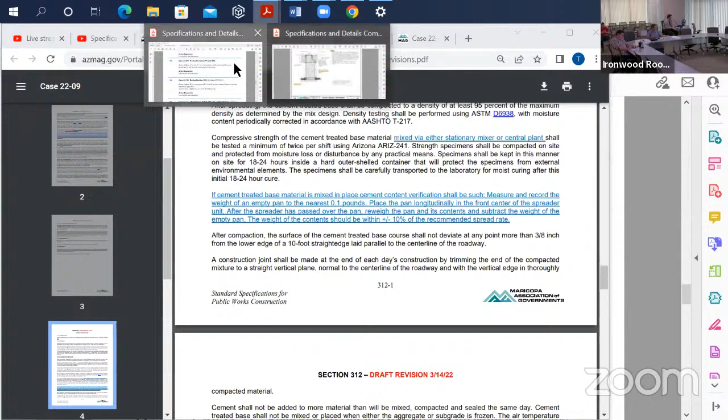Revise section 702 to remove the 50% limit of recycled material that can be used, I assume in asphalt mix, is that correct? For base materials, excuse me. Same thing, no comments in the last month.

We had no discussion about this at our last working group. I haven't received anything, so I would do the same thing here as with the last case. Make sure your team members have taken a look at it, and I'll be looking at the potential to get it voted on in the July meeting. Okay.

Any comments, any questions on this one? Yeah Jeff, this is Craig. I've kind of stuck a stick in my management side saying, hey, let's take a look at this, because we've had some standards on this in the past, and I wanted to make sure they're getting a look at this. So I sent it to them again as a follow-up, hopefully to get their attention. I'm trying to get something for you from our management team. So as soon as I hear anything, or if I don't hear anything, then I guess you'll know from there.

I appreciate it, Craig. We have several months left in our season yet. I would just like to have something we could finish by the end of this year on both of these cases to move forward into the standards in January. No, absolutely. And the one thing I don't like to do is come to you as soon as we're ready for a vote and say, hey, I got a comment, and we've had this for 3 months. So I'm trying to get ahead of the curve there. Craig, you would not be the first and probably not the last, but we'll take comments whenever we get them. Right on. Okay.

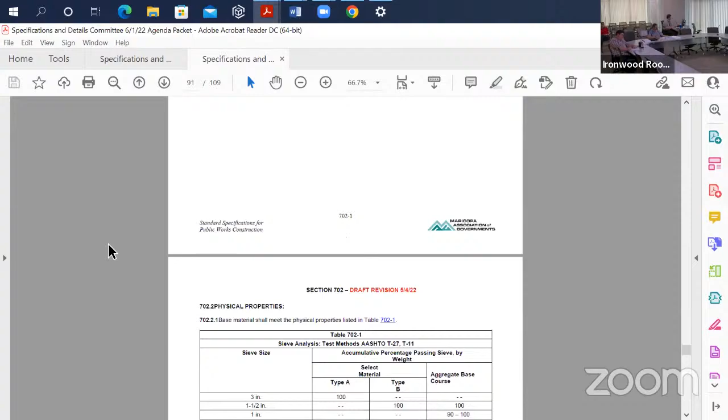Hearing no other comments or questions, number 15, case 22-11, revisions to detail 420-1 and to update note 6. Updated 5/16/22, revised note 6 to clarify depth measurement and manhole modifications. Jim Badovich is the sponsor on this one. Yeah, thank you.

So you see there the note 6 highlighted. That's been changed from what's in MAG now, just to clarify where that measurement is to be measured to, just clarify what is the 20-foot cover, because it wasn't clarified before. So we added that the 20-foot in depth is measured to the deepest outlet pipe invert shall require an engineered base design.

The only comment we had, it was brought up at the last meeting and then discussed at the working group, is that we don't really need the word outlet in there, because typically the deepest pipe should be the outlet if the sewer's working properly. So the only change, which I didn't have a chance to do on the detail here, would be to eliminate the word outlet. That was the only discussion we had at the working group. So I'll bring that back next month with the word outlet removed, and if there are no other further comments between now and then, I'd like to see if we can maybe vote on it next month.

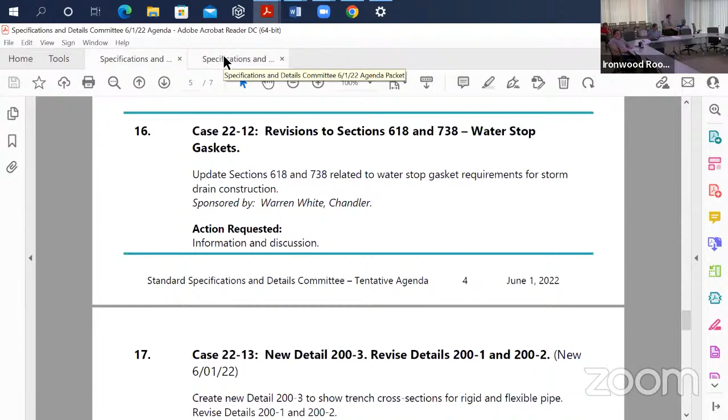Number 16, case 2212, revision to section 618 and 738, water stop gasket. Update section 618 and 738 related to water stop gasket requirements for storm drain construction. Sponsored by Warren.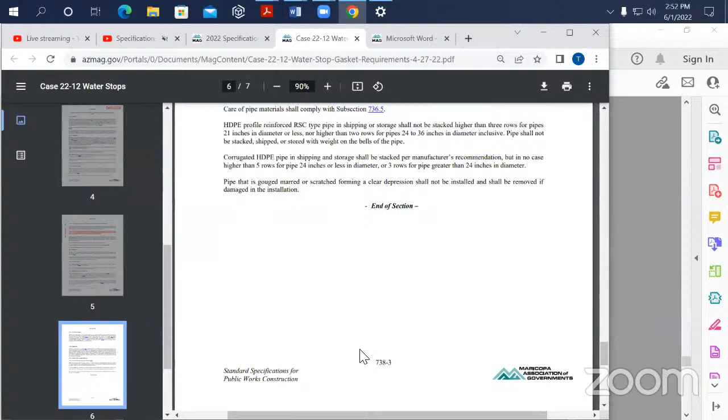No changes to the material in the pack at this point. I haven't received any additional comments, but we did discuss at the working group, and water stops are referenced in a number of other sections, primarily section 505 concrete structures, and also 615, 738, 739, 740, and PVC as well, 745. What I'm going to do is make some suggested minor tweaks to those other sections and talk it through in the working group.

I think ultimately the easiest route is to update section 505, adding the ASTM C923 reference for water stops in section 505.6.4. Then it may be just as simple as referencing that in all the other sections I mentioned. So a little bit of cleanup to make things consistent, but I'll hopefully have that ready for the working group to talk through a little more.

Any comments, questions? Warren, you mentioned quite a few different sections. Are you saying we don't have to revise all of those? We just have to revise one that would take care of that?

Not exactly, Carl. It'll be, like I said, 505.6.4 in the concrete structures covers water stops. The paragraph there will need some minor revision, including adding that ASTM C923. The other sections, where we say elastomeric water stop gaskets shall conform to the requirements of ASTM C923, we may instead say water stop shall conform to the section 505 mentioned. So that's what I need to draft out, some options, and present to everyone to see what their preference is.

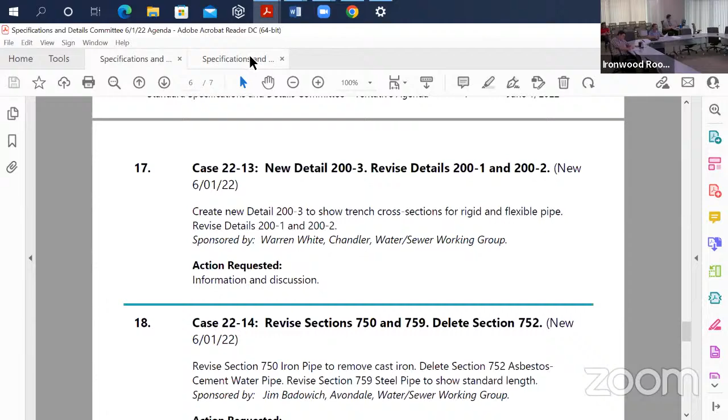22-13, new detail 200-3, revised detail 200-1 and 200-2. This is new today. Create a new detail 200-3 to show trench cross section for rigid and flexible pipe. Revised details 200-1 and 200-2. This is sponsored by Warren.

Thanks again, Carl. Yes, this is the draft that was presented by Adriana and Stu from Rinker in our working group. It made sense to illustrate the differences between the installation of rigid and flexible pipe. Thanks, Adriana. I did spell rigid incorrectly there, so I need to fix that. But putting them side by side, you can compare the difference between the two materials, and then the backfill allowances that are all part of what's stated in section 601, in terms of the haunching zone, 2 foot versus 1 foot placement of the material.

And there again, in the initial backfill, the allowance for 2 foot and 1 foot, and also the fact that with concrete pipe you can use native material, obviously with the appropriate material size, as noted in section 601. So basically that's what this case is - just cleaned up these cross sections a little bit from what's currently in the detail, moving some things around a little bit. And the notes down below are tweaked slightly from what was there before.

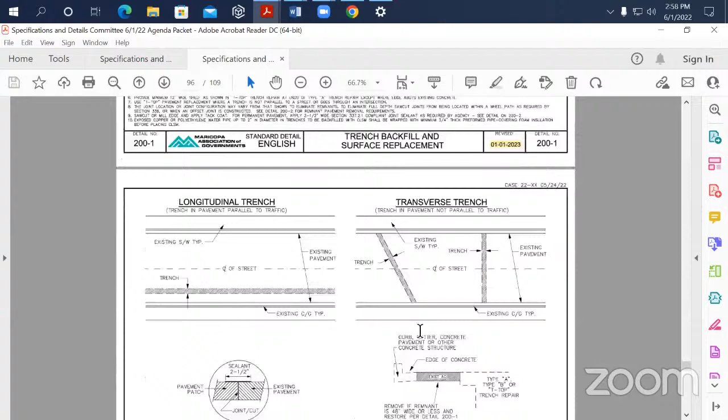On the 200-3... I'm sorry, I can't quite see it, it's got to be a little bit bigger. What are the differences? Is it the backfill? Yes, that's the material, Carl. Just the different allowances for the lifts, 2 foot versus the 1 foot. Oh, okay.

And then note number 2 covers the fact that there may be some slight differences between the trench widths and so on for the different materials, but it just kind of pulls everything together.

Are there any questions on this new detail? No comments? Okay, look for comments next month on this new detail.

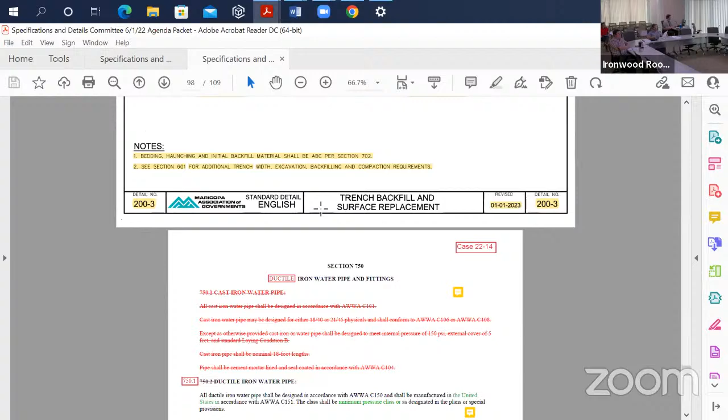Number 18, case 2214, revised sections 750 and 759, delete section 752. This is new. Revised section 750, iron pipe, to remove cast iron; delete section 752, asbestos cement water pipe. Revised section 759, steel pipe, to show standard length. This is sponsored by Jim Badovich.

Yes, thank you. So this is a new case. A gentleman from American Pipe, Wyatt Robinson, brought this to our attention at the working group. There's some outdated sections as far as related to the ASTMs and some other stuff, because basically now it's ductile iron pipe, not cast iron anymore. So again, we're just trying to bring it up to the 21st century.

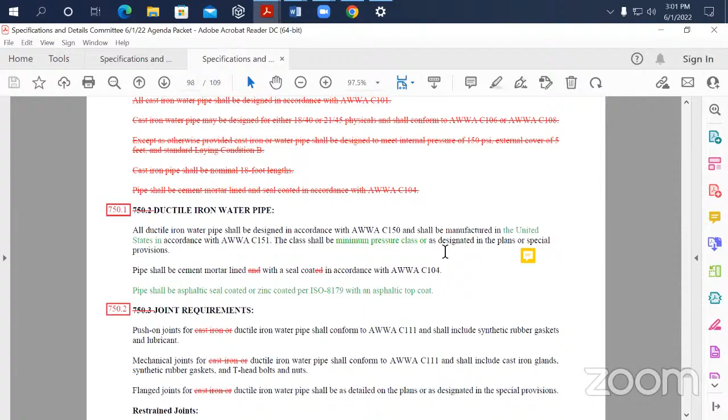And there's more than the ASTM, so it really is not a blooper case. That's why we were best to do a separate case, because there are some significant changes. So anyways, basically it's two things: updating the iron pipe to eliminate cast iron and clarify it as ductile iron, and then of course getting rid of the asbestos cement pipe that nobody uses anymore.

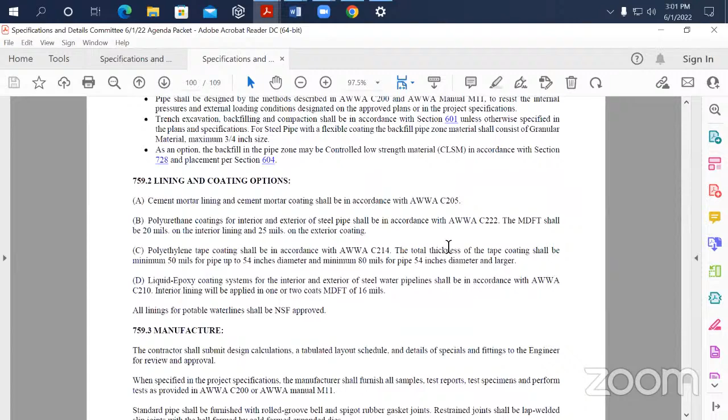So again, we're discussing this at the working group. If you have any comments, let me know, so we can get it in for discussion later on this month. This looks pretty straightforward, haven't had a whole lot of discussion. So anyways, that's it, looking for any comments people may have.

So there's still cast iron and asbestos pipe in the ground. True, but this is for construction of new pipelines. Okay, and if it's repaired or replaced, it's with either PVC or ductile iron, is that correct? Yeah, I don't know anybody that replaces asbestos with asbestos. I don't think you can use it anymore, to be honest with you. Yeah, it was always difficult to work around, I think it's outlawed now. Working around eggshell.

Any comments, questions on this new case? The only other thing that Jim didn't mention was Wyatt Robinson also said that for steel pipe, it comes in a standard length of 50 feet, not 40 or 60 as it's shown in our specs. Right. So again, we're just trying to keep our MAG specs a little more current with the industry.

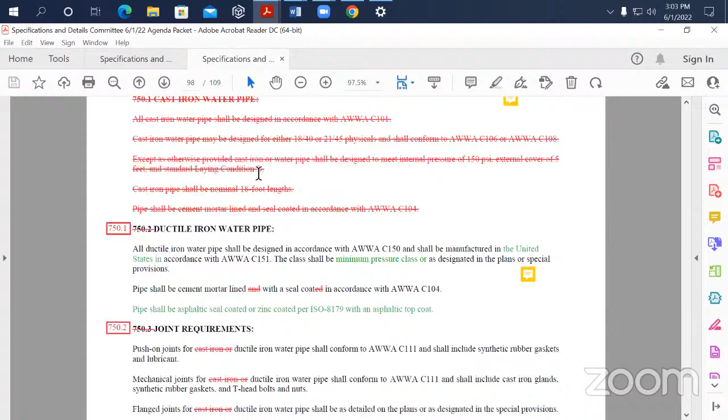Do we still show some of the details with the cast iron? You might be right about that. Yeah, maybe we ought to take a look, see if there's any cast iron left in old details. Take a look at that.

Yeah, Jim, I was just doing a quick search in the specs for any of the ISO standards, and we were going to put it in the polymer concrete manhole standard, but I think we took that out just because the ISO wasn't anything that we've typically used. I don't know if there's another zinc coating standard that we can use for that instead of the ISO standard.

Yeah, I would agree, to me ISO wasn't technical like ASTM, so if you read some of these... So we'll look into it a little deeper under the working group. Yeah, but that ISO spec may come out, we should probably see if there's something else to cover that. Yeah, I think it's covered in AWWA C104.

So again, the ISO is kind of, I don't know what you want to call it, really generic. I kind of see it more as a record keeping standard. Yeah, I think you're right. So it's not, I don't know, I don't think it belongs in a construction spec, but I know some people do include it. Yeah, agreed. Good comment, thank you.

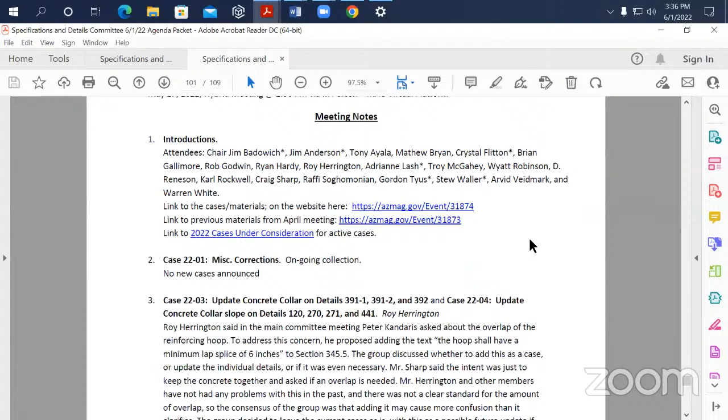Yeah, we met, hold on, let me pull it up here. So we met on May 17th. Basically discussed the cases that we voted on or are going to vote on, from Warren's cases and Roy's from Scottsdale: the manholes, adjustments and the abandonments, and the collars. We talked about that.

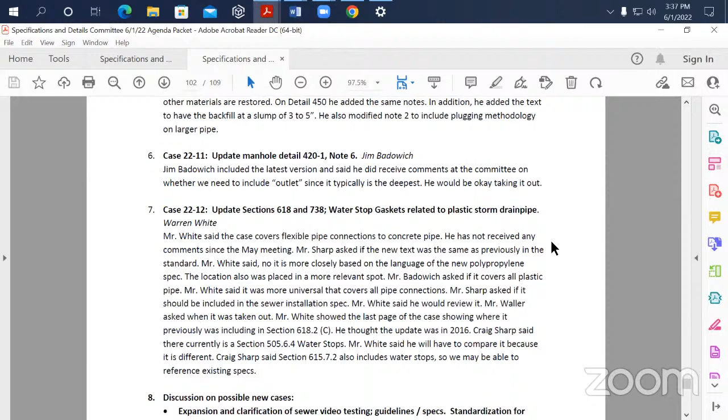Talked a little bit about all the cases you've seen, water and sewer related. We did have a little discussion on trying to come up with a spec on the sewer video testing and mandrel standards, so we're working on that. Trying to come up with a standard air relief detail, and we've got industry people helping us on that. The ductile iron discussion - that was about it.

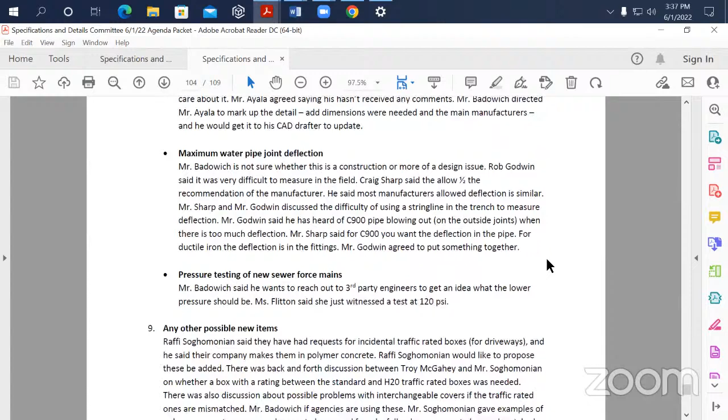We did have a little discussion with some industry folks about the mag meter boxes. Apparently there might be some differences in the dimensions, so we may be visiting that in the future shortly to see if we need to modify to fit the industry measurements and being interchangeable, because some of these boxes are not to be put in concrete, and the ones that are, they call them incidental loading. So it's not an AASHTO H20 box with a steel lid, it's something that can take occasional traffic, like we use in residential areas, sidewalks and driveways. They seem to be holding up okay. But anyways, that may come up in a future case.

Our next meeting will be June 21st, the first day of summer. So we're doing both in-person and virtual meeting, so you have the choice. And that's it, thank you. Okay, thank you.

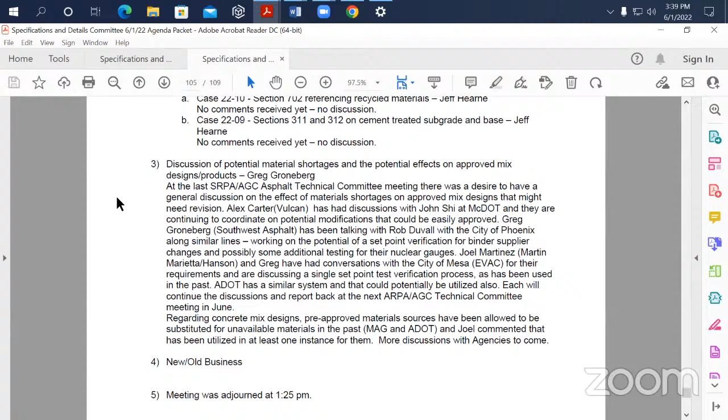Asphalt Materials, Greg or Jeff? You see the meeting notes in your packet. As I mentioned earlier, we discussed case 2210 and 2209. We didn't have any discussion on those in our last working group meeting. We did have just a general discussion about material shortages and the effects those could have on approved mix designs, particularly asphalt mix designs. We didn't really come to any conclusions, we were just kind of brainstorming amongst each other as to how the process might go.

Various individuals had, as you can see by the notes, various discussions with different agencies, and we'll probably have more of that kind of discussion at our next MAG working group. But I want to point out that the next working group is on the 23rd of June. It's not the third Thursday, it'll be the fourth Thursday this time. We moved it one week because the ARPA convention is that week we would normally meet, and there'll be nobody here at the ARPA offices. So make sure it's Thursday, the 23rd of June, 1 o'clock.

It's a virtual meeting, correct? And it's a virtual meeting, yes.

Okay, thank you. If I could, for just one second, I'd like to expound a little bit on that whole conversation. EVAC is allowed a 1-point verification, as does ADOT, and we're just trying to look for some sort of commonality across all of them. It's not for changing aggregates at all - this is specifically related to a binder supplier change for the same grade, where most generally your burn-offs and your nuke calibrations that City of Phoenix does are more predicated based on the aggregate components and not the binder components. So that's why we're having these discussions, to try and move that along. And as Jeff pointed out in the notes, concrete has pre-approved different cements or whatnot in the designs. We're just looking for the same approach to give us a little flexibility, especially in some trying times, I guess.

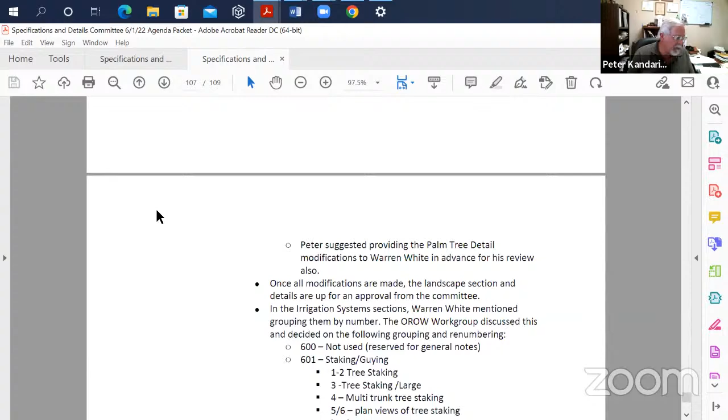Peter gave a summary of the notes, covering landscape and irrigation details already discussed, and some of the categories talked about. Other items are being worked on, hoping to get to some before July, though it's uncertain at this point. Two details are in progress: vegetated bioswales, rock detail and section details, and the spillway details, which he's trying to resurrect.

Our main person working on it has been very busy with the City of Tempe, where there was a water break near the freeway that ate up his time. We understood that, so if it gets delayed, it gets delayed.

For the underground storage tank, Keith Ketsty with City of Tempe talked to Warren about what's going on, and the Chandler experience is probably driving a lot of what we're learning. Chandler is considering eliminating underground retention tanks made from CMP materials, so we want to look at broader options beyond CMP, including other materials and vendors. Keith is continuing his research, and we want to make sure we get it right before putting something together.